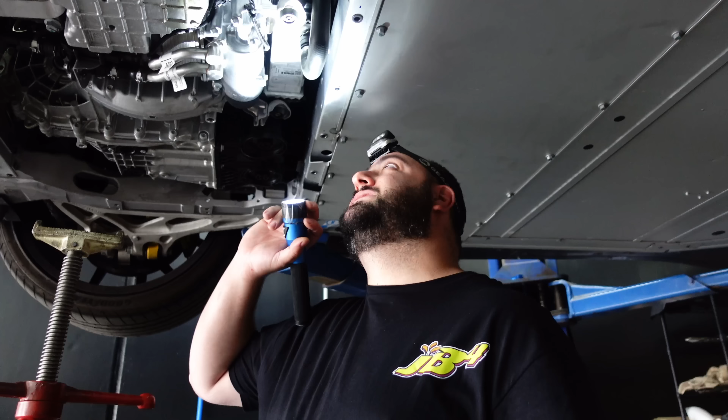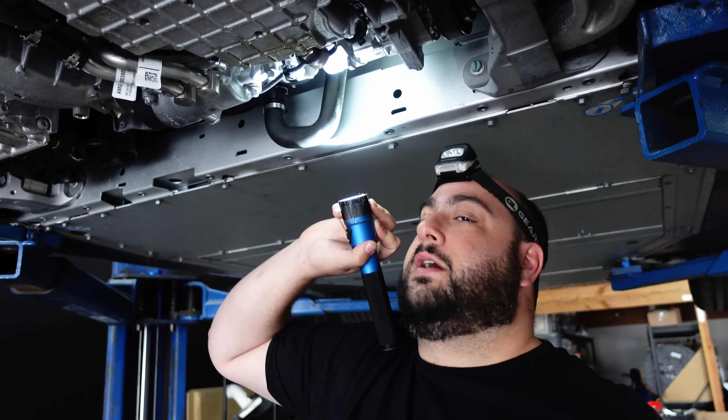So the top connector is easy to get, no problem. This bottom one, man, it is tricky. I was doing development on the CLA, I think like 3 or 4 years ago, and Terry and I found the install literally just difficult, like a 10-star difficulty. This one looks to basically be no different, but it does have more room, so with some proper instructions and guidance we are able to lift the intercooler up and out so we can pull the connector off. Once we pull it off, we'll be able to connect it.

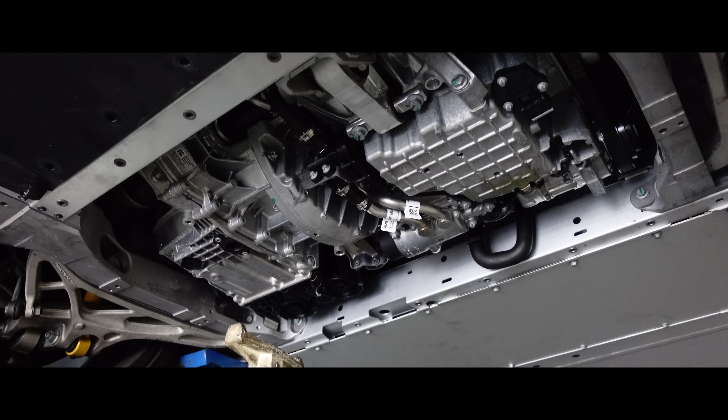How you doing there, Pyam? Not well. How much trunk space does a Lotus Emira have? It can fit one Pyam.

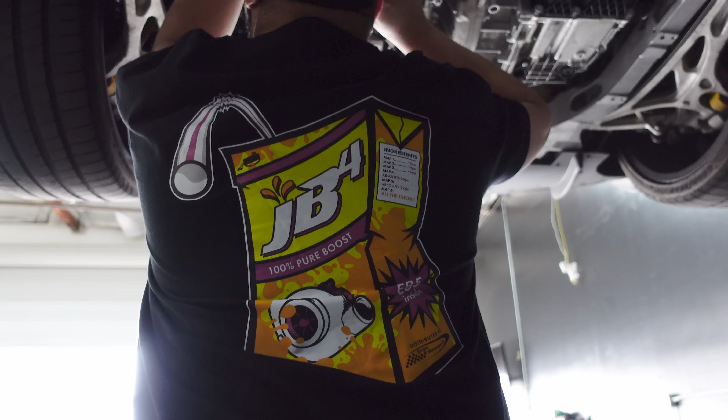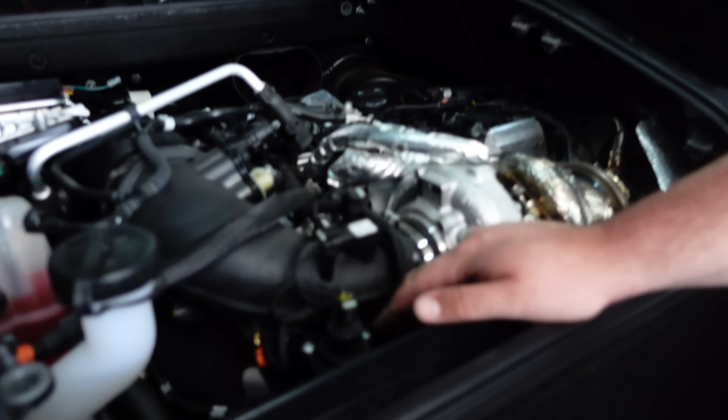The JB4 is nicely, neatly tucked away in that corner, and we also have a blow-off valve kit for this. Just pull out these 3 screws, pop our spacer diverter valve, and you get the nice blow-off valve. We're going to route the OBD through. We've got the 2 connectors - the bottom one is definitely a lot tougher to get, but that's basically where the JB4 is gonna sit. Let's route the OBD now.

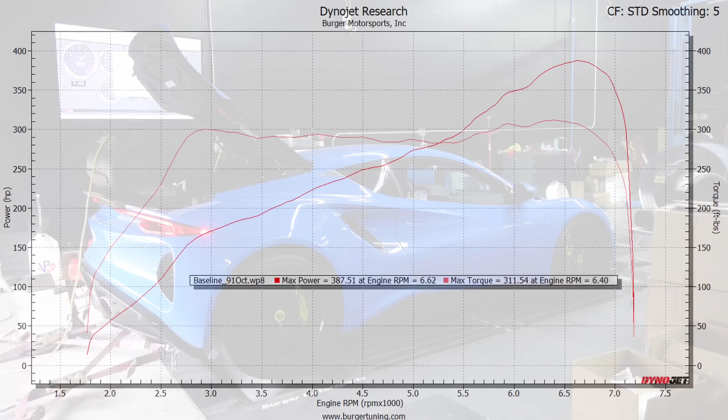Now that we have the Emira strapped up on the dyno, it's time to get some base runs on this car. What do you think it's gonna make stock? How much does Lotus claim? 360 horsepower, 317 torque. Let's get some base maps and actually see what she makes, with JB4 disabled, completely stock from factory. This is a completely stock run on a Lotus Emira: 387 wheel horsepower and 311 foot-pounds of torque.

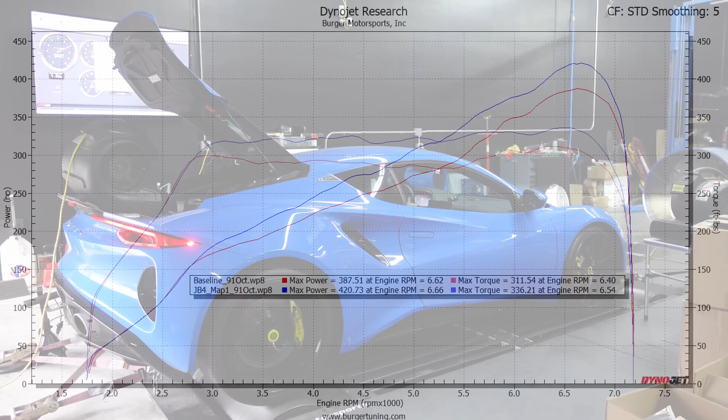I think Lotus is lying about what they make from factory. But now it's time to switch over to JB4 Map 1 and see what she can make. This is JB4 Map 1 on 91: 420 wheel horsepower and 336 foot-pounds of torque. That's a 33 wheel horsepower jump just on 91, and we haven't even switched to E yet. We're still on map 1, but now it's time to jump it onto map 2. Looking at the log on map 1, I do see some timing corrections.

I don't know exactly what fuel is in this car - I emailed the customer just to make sure it is on 91. I'm going to load up IAT spoofing next to see if we could try it on the next run. Usually that lets us get the IATs higher, which leads to lower timing but higher boost - it's a compensation. You gotta play with it; some platforms it works, some it doesn't. So I'm gonna go ahead and try IAT spoofing, put it to 150, and see if we can get timing down so we don't get those corrections, but get boost up and still make same or more power, or see if it even works on this platform. This is JB4 Map 1 with IAT spoofing.

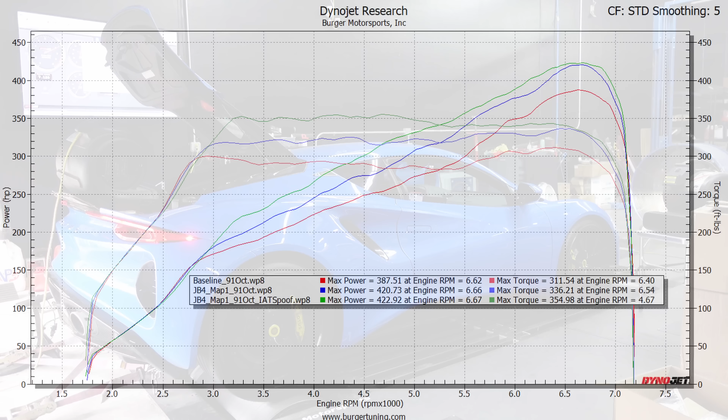422 wheel horsepower and 354 foot-pounds of torque. So what happened, Pyam? It definitely did work, did exactly what we wanted. We got a bit more boost - well, three more pounds of boost average overall - and a lot less timing correction. So in the mid-range you can see a lot more power all along the graph, but peak power is basically the same. That's a good sign, we'll play with that later.

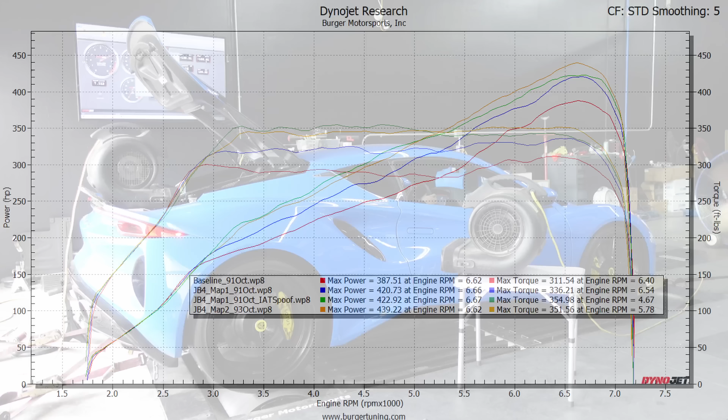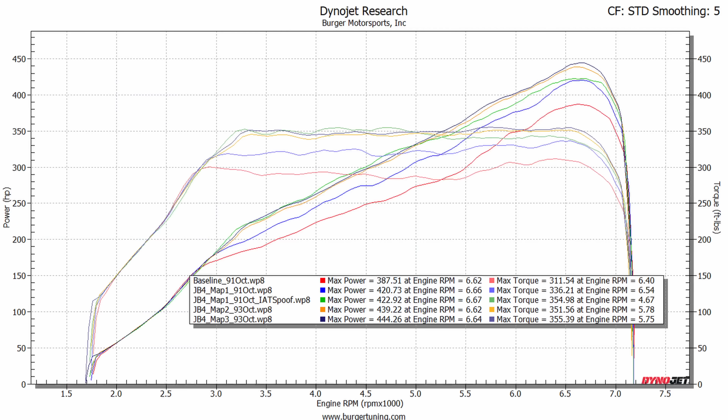We're gonna go ahead on map 2 and disable IAT spoofing, let's see what we get. Here's JB4 map 2 on 93: 439 wheel horsepower and 351 foot-pounds of torque. It's looking good, log's looking good right now. Map 2, 93 - go ahead and turn it up to map 3 next. This is JB4 map 3, still on 93: 444 wheel horsepower and 355 foot-pounds of torque.

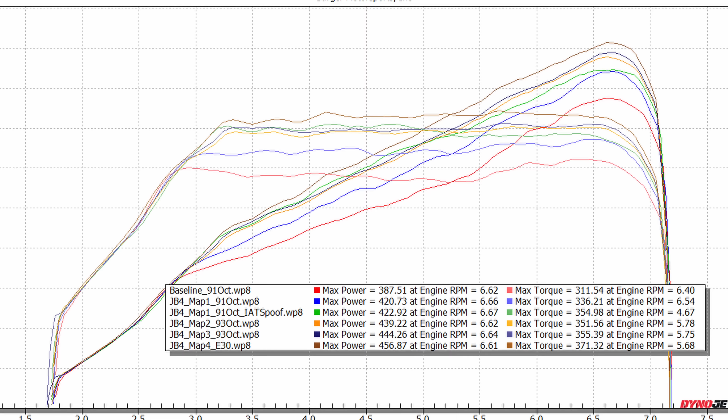Yeah, that's normal - map 3 is only half PSI more than map 2, so you can't expect much. We're only half a point of PSI, but the logs are looking good, so map 4 next. This is JB4 map 4 on E30, and there we have it: 456 to the wheel and 371 foot-pounds of torque.

From stock to map 4 with just a JB4 is a 70 wheel horsepower gain - definitely very impressive for a 2.0 turbo with literally just a tune and some higher octane. I remember the days of the 2.0 turbo, like 15 years ago, when you literally had to go big turbo, fuel system, etc. to get anywhere near the 400s or above. Basically slap on a JB4 and you're over the 450 wheel horsepower mark just like that. And don't forget, we do have another higher map, map 5, which is for race gas. We don't have time to test that today, but I'd assume it's around 470 to 480 wheel horsepower with race gas on map 5.

On to the next Lotus for the series. Do you guys think that was the end? The Lotus development is not over - right here we got another one. And here she is: this is the 3.5 supercharged V6 version of the Camry motor from Toyota. The last Emira was the 2.0 from Mercedes. Looks like Lotus can't really make their own engine, so they just gotta borrow some shit, you know?

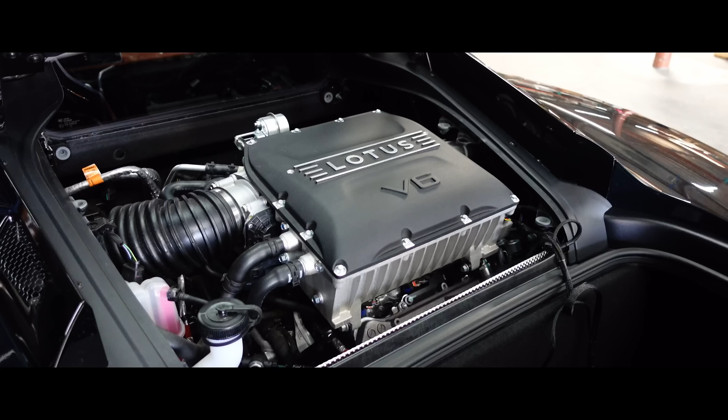The JB4 is mostly used for turbocharged systems, but we've had luck in the past with other supercharged platforms like the Audi S4. So we got a JB4 rigged up. We're going to get some live data from it, dyno it while making more boost, on map 0 and map 1, and see if we can get any gains. At least we'll get baselines for this platform so we can compare it versus the 2.0 turbo.

Do you hear the vacuum? Yes, did you hear that? Yeah, it's so formed to my fat that I couldn't get out. Listen. I can't get out. Oh my God. There's no...

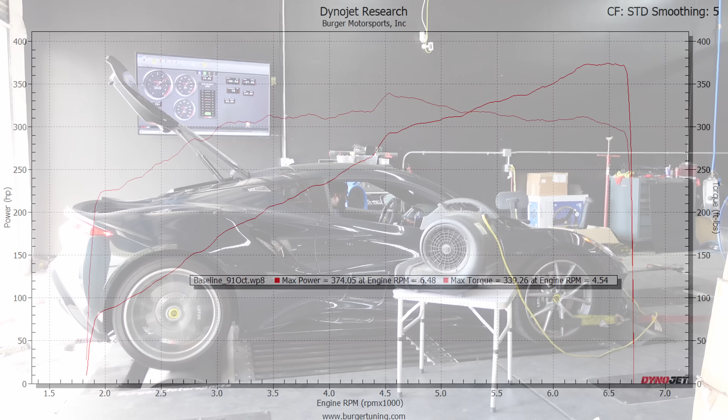3.5 V6 Lotus Emira, JB4 set to map 0. 374 wheel horsepower and 339 foot-pounds of torque.

Do it again, you can hear it. It's just vacuum, I'm fat. I'm so formed in here that it creates like an O-ring seal.

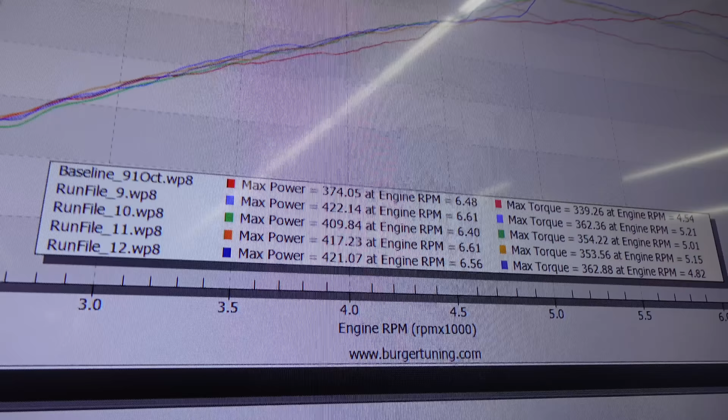This is JB4, map 6 on 91. 421 wheel horsepower, 362 foot-pounds of torque. That's a 50 wheel horsepower gain here on map 6.

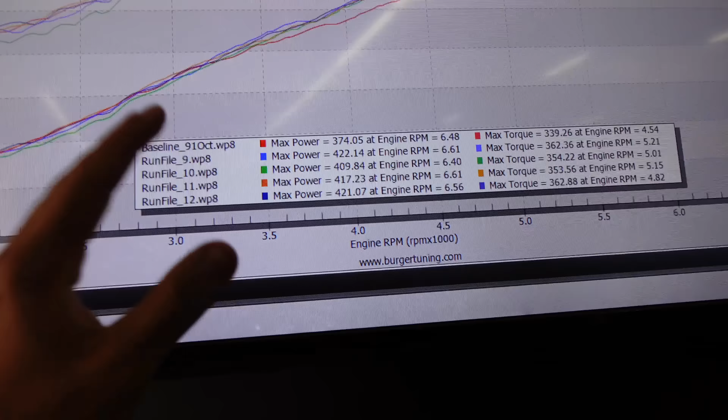If you're wondering what map 6 is, let's ask Payam. What is up, guys? Getting some good results now that we've got the JB4 development going and making some good changes. Map 6 is basically custom mapping where I'm able to make changes on the fly. Map 1, 2, 3 are all preloaded boost profiles we're already familiar with on cars we know will make that much boost. Since this is a supercharged platform, totally unrelated to the turbocharged stuff we do, I need to start from scratch - this is alpha JB4 development. Right now we're comparing map 0, the stock bypass, to this custom map 6 I made.

We're basically seeing a gain of 2 PSI for these results just on 91 octane. You can see all the runs - I'm making fine adjustments here and there so we can see what gains or loses horsepower in the development we're doing right now. Pretty happy with these results on 91. I think we're going to add some E85 to it, mimic 93 octane, and see if we can turn it up some more from here.

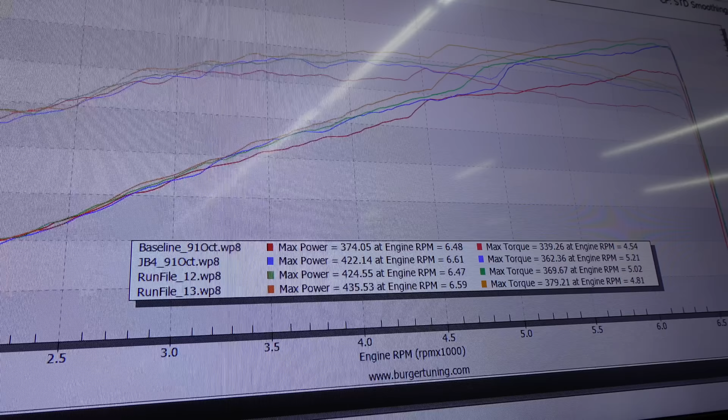This is JB4, map 6 on 93. 435 wheel horsepower, 379 wheel torque. We've now gained another 10 wheel horsepower and 10 foot-pounds of torque.

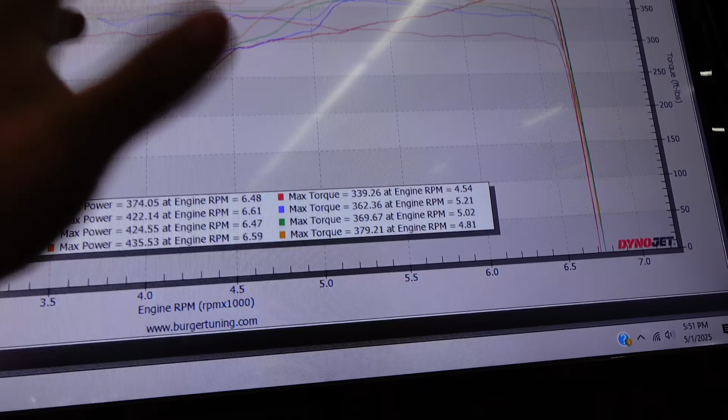Looks like the octane is definitely helping it when we're raising it. Targeting more boost - this one is around 9 to 10 PSI compared to the previous one which was around 8 to 9. Timing is cleaned up, we're hitting more boost, which obviously relates to more power. You can literally see it under the curve. We'll keep going and see how much more we can push it on the 93 before we go with E85. JB4 map 6 on 93.

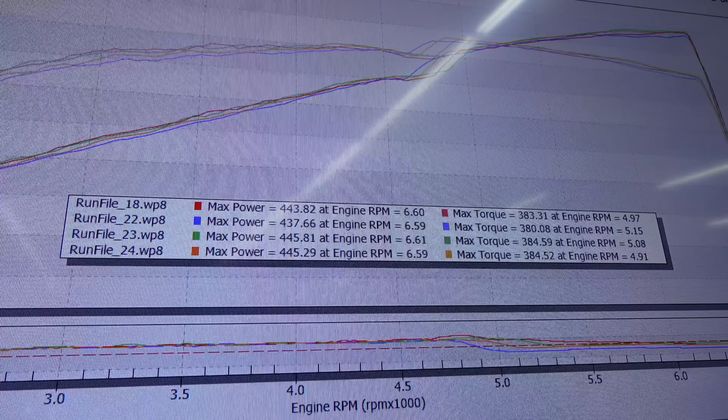445 wheel horsepower yet again and 384 foot-pounds of torque. I think that's it, but let's confirm with Payam. Logs are looking good, I'm pretty happy with this on 93 octane.

Would like to add more ethanol, but I think we're tapped out on this platform. The next step up would be to use race gas, which I don't have at the moment. Plus the car has a little more fuel than I wanted, so I can't drain it or use it up and go get some down the street. Pretty much going to stop here. I'll make a few more tweaks I think I can do and see if we can make more gains - if not, we'll probably just end it here.

JB4 map 6. 461 wheel horsepower, 396 foot-pounds of torque. There we go. Oh, yeah! And that's all she wrote. 460 wheel horsepower and almost 400 wheel torque out of a supercharged 3.5 liter V6 Lotus.

Yeah, the gains are outrageous - just up top, making so much power and torque with the plug-and-play JB4 system. You can't get any better than that. So I think we're finished here, I'm happy with the results, and I know Terry's happy with the results too.

So that's going to end it for this video on the Lotus series. We've had back-to-back Emiras, the turbocharged and the supercharged, both making insane gains. The supercharged V6 making 87 wheel horsepower over stock is crazy to me. I know Payam and I really enjoyed this series, and I hope you guys did too.